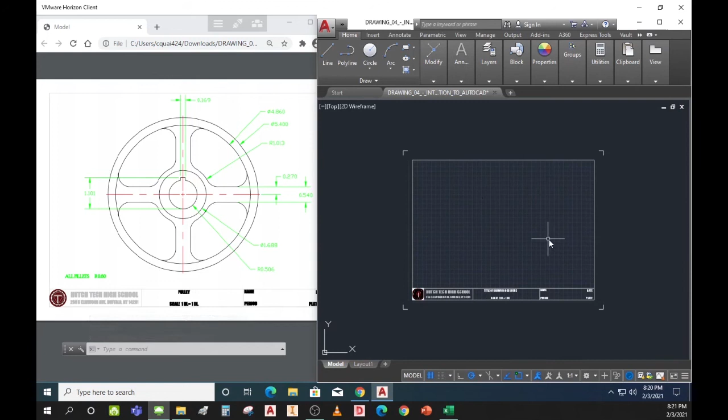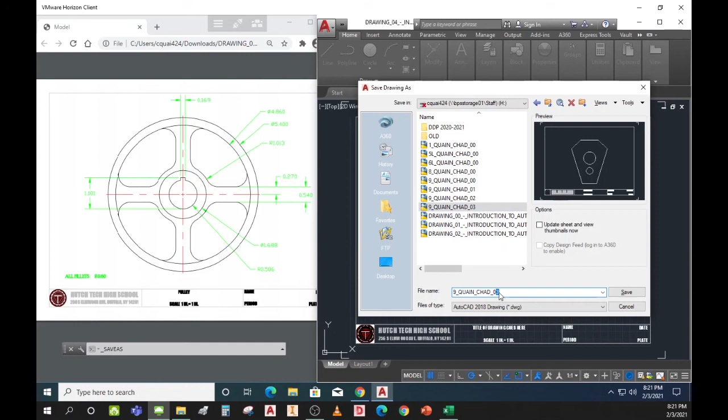I'm going to do my zoom extents, which is just a simple double click of my mouse. Then I'm going to come up to my A, go to save as, change it from documents to my H drive, pick my way to store my file. Remember, 9 is my fictitious class number, last name underscore first name. Change this to drawing number 4, and hit save.

Now I'm going to go ahead and turn on my autosave. So it's WSAUTOSAVE 1, enter. Simple as that. Now I've got my autosave working, so that way if anything happens, I've got a backup plan.

So I'm going to come in here, go into the line command to start with, and find the center of my area. I've just drawn a line from here to here, left click, enter. Now I want to start by creating some circles. I'm going to come up here and go to circle, and you'll notice—oh shoot, I don't have the ability to find the middle of this line again.

There are some things I can do, and I'm not going to get into them too much this time, but we're going to type in a command called mid, M-I-D. That's going to show me the midpoint for this object. We're working? There we go. All right, so I'm going to click there.

Now let's take a look at one of our dimensions. You'll notice that most of these dimensions are diameters—if you see a circle with a line in it, that means diameter; if you see an R, that means radius. So let's look at our largest diameter first. Here's our outermost circle, arrows pointing to it, and notice our arrows point directly to the center of our circle. That is correct dimensioning.

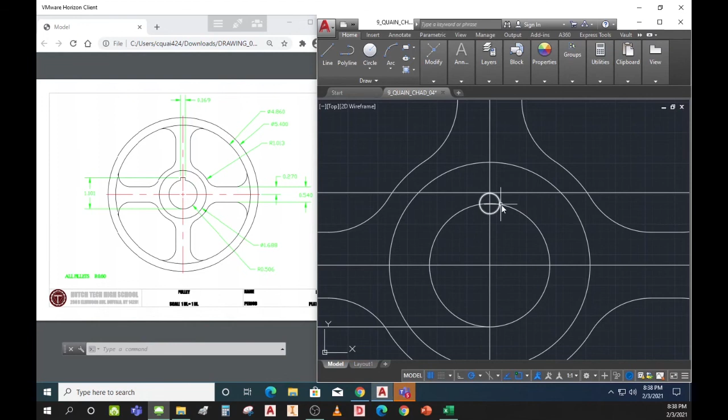I'm going to go into the circle command, come over here to this intersection - I want to do it right here. And then I'm going to type in D, enter, 0.169, enter. Now I have the exact width of my keyway just by that circle right there. Wherever it intersects this other circle, I know that's how wide it's going to be.

So I'm going to do this - draw a line from this intersection point straight up. I don't care if it's too long. Right click, enter, right click, repeat line, or the space bar, whichever one you got to do. Straight up, right click, enter.

I don't need this circle anymore, so let's just get rid of it - extra information that we don't need. Now I'm going to come into modify, trim. All right, let's go back to the old school way. I'm going to select this object here, this object here, this object here, this line here, this line here. So I got all those things selected.

Probably don't need that line there, so I can hold the shift key and select it, I believe. No, it's not going to let me do it. Doesn't really matter. And then I'm going to go ahead and right click.

Now I'm going to select on the pieces that I want to get rid of. I don't want to get rid of that circle, just want to get rid of the lines that are in here. And make sure that you go in the order that I went in - I'm starting at the outside most line, and then coming into the next one.

And then I'm going to do this line here, this line here, this line here, this line here, and this line in there. Okay, right click, enter, get myself out of it. Now, why did I pick those lines out there? So that I didn't have to come back and delete those later on.

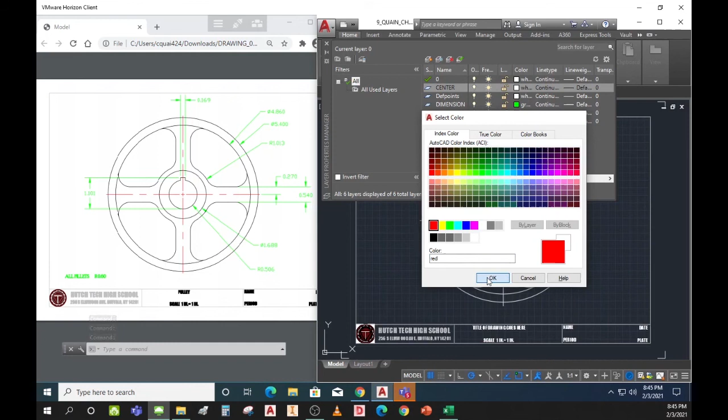I'm going to come over here and change its color from white to red, hit OK. Then I'm going to come over here to the line type and change it from a continuous straight line into something called a center line. So let's click on this continuous, and notice we only have a hidden line sitting here and a solid line.

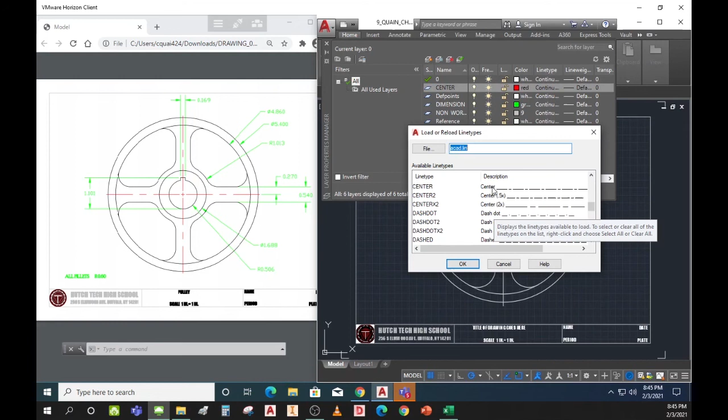Well, that's a problem. What we need to do is click on this load button, and then scroll through and find something called center. Now don't worry about this half-scale center and this double-size scaled center, we're just going to use the regular old center. I'll hit OK. And then the last thing you have to do, which is kind of silly, is you actually have to select center and click OK.

So now that we've got that, we have our center layer highlighted. I can go up here and click on the close button.

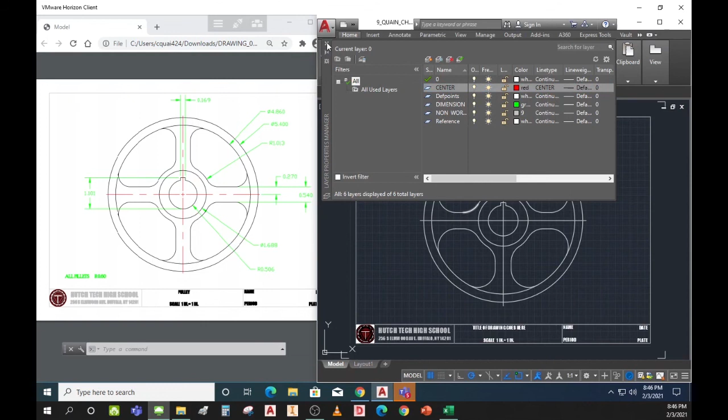I come over to layers again and change my center layer. Then I'm going to select this line here. Notice that they are sitting on the 0 layer, but I want them to be on the center layer, so I'm going to simply click them over to the center layer.

Pretty cool, I'm going to hit escape. All right, so these look pretty good. Now there's a little bit of difference - I've got this little crosshair in the middle, but we're not going to worry about that for this. We're just going to get it so that it looks pretty good. And I think that looks pretty good.

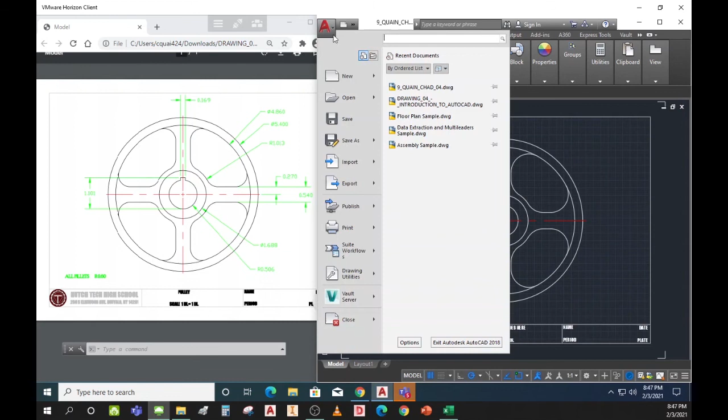So now the next thing that we need to do is a hard save, because we've done a lot of hard work. Let's go up here and hit save.

Now that we've saved our object, the next thing we're going to do is go through and start doing our dimensions. Now, in order to do dimensions, we have to do a couple things. First, we need to change our layer, because right now we are on the red layer, or the center layer. We don't want to be on that. We're going to come up here to layer, change this to the dimension layer.

Now the next thing we're going to do is start with dimensioning. But before we do that, why don't we make sure that we have everything correct up to this point? Now, I don't want you going through and modifying anything, because if you start modifying text, you could possibly put it on the wrong layer, and I don't want you doing that. But just do a final check, make sure everything looks right for you.

So the next thing we're going to do is start putting our dimensions in. We're going to come up here to Annotate, and then we have this dimension, called quick dimension. I'm going to click on quick dimension, and then we are going to start to dimension some objects. So all I'm going to do is just click on them.

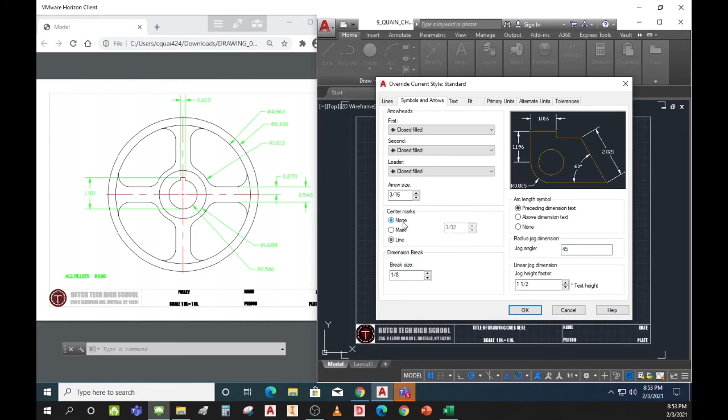Now, I could turn it to - take a look at this icon right here - if I had mark, see it just shows a little crosshair in the middle. I can go line, yeah, it makes it a line there. Okay, I'm going to just select none for this, it just makes it a little easier. Go ahead, hit set current and close.

Now let's try that one last time - dimension. Okay, selected my object. Try to get it so that our dimensions are on the outside of our object. All right, and notice it will place it anywhere on the circle. I'll place it right about there - it's not too close to the border, but it's not on the wrong side of the object.

I'm going to select another one here, which is going to be this circle right here. All right, I'm going to stretch it out.

And I'm going to go ahead and place it similar spot to where the other one is. Okay, I don't know what this is doing here. I like that, I don't know why it's doing that at all. So let's go ahead and delete that.

Let's try to go back into annotate again. I don't know if maybe I clicked something here. Oh, that's kind of weird. All right, so there's that. I must have double clicked or something. Let's take a look at another one here. We got radius here.

And then, oh, I see what it did. See how it's trying to do it. See how it's trying to do this here. We don't want that. I'm going to go ahead and enter, and then hit spacebar again.

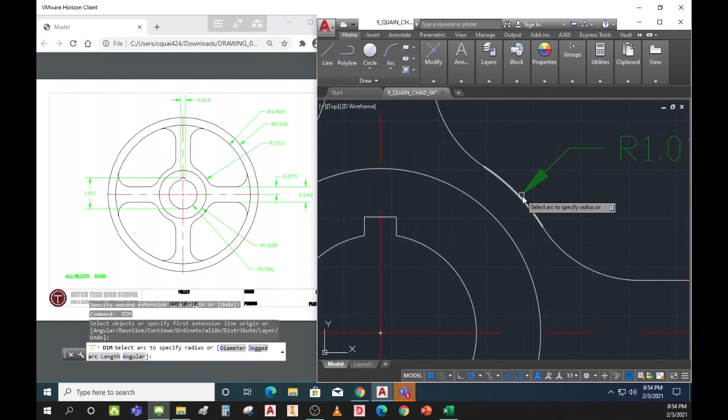I'm going to try to pick this circle right here. Okay, now see how I had to zoom in real close to get it. Sometimes you have to do that. Go ahead, click. Remember, I can stretch it out if I need to.

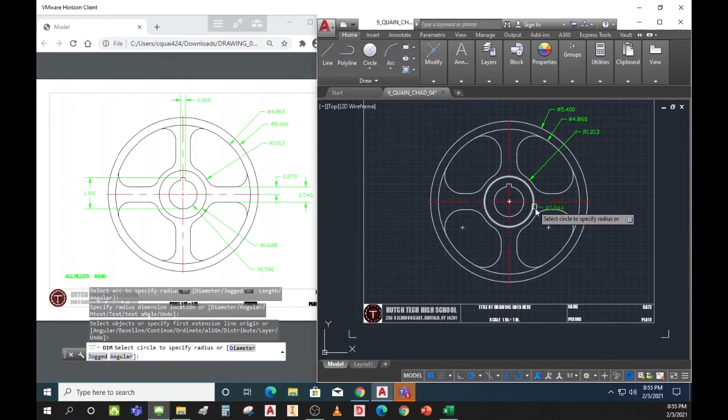And I'm going to place it. I'm going to look here. I got a couple more. I've got this one right here. Go ahead, place it in a similar place. And then I've got this one right here. Right here.

All right, so now we're done with all of our dimensions here. I'm going to hit escape one time. Escape one time. Escape. There we go. All right, so now if we look at our dimensions, they look pretty good except for this one right here. This one is definitely wrong.

So what we can do is we can go ahead and fix it. We're going to go ahead and change this so that it is the correct dimension. This is obviously not right. I'm going to double click on it. There's some easy ways to do it, and there's some hard ways to do it.

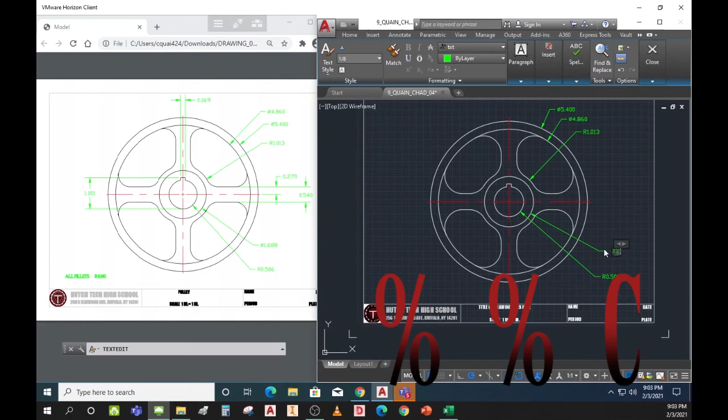I'm just going to delete this off, and I'm going to type in the following: percent C, which is diameter, 1.688, and then enter. Or click in the black abyss. Just want to change that one to percent C, 1.688.

Now, the last thing that we've got to do is put in a couple of dimensions here, here, and here. Let's go back up to that quick dimension. We're going to click on this endpoint here, this endpoint here, drag it over. Beautiful. And we're going to zoom in, click on this endpoint here, this endpoint here, and place it.

Last one is going to be our overall height, so that was from here to here. Now, you see how it wants to put it at an angle? We don't want that, so we're going to go ahead and cancel.

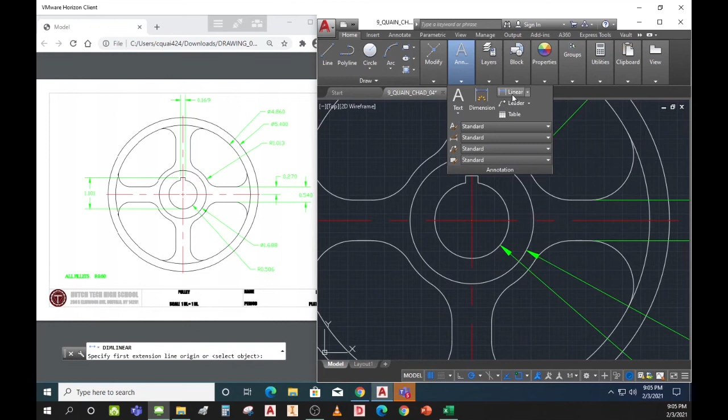We're not going to use quick dimension, but we're going to go ahead and use linear dimension this time. That way, if I click here and then I click here, notice what it does—it gives me a nice straight dimension. Place it over there. Beautiful. So now last thing we got to do is one more dimension right here.

And I'm going to use that linear again. I'm going to click here, click straight above, slide it over, and place it. Oops, now it did not go where I wanted it to go. So now I can go ahead and use the shrink stretch, and I can just kind of move those dimensions around to where I want them to be. Hit escape 2 times. Okay.

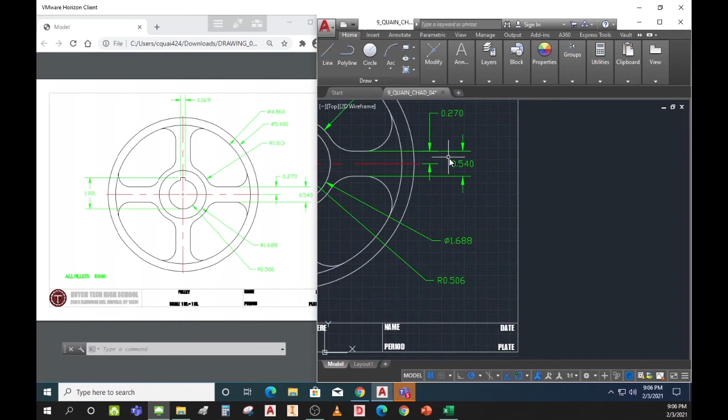Now, we can get all fancy. See how if I highlight this, there's a dimension line that kind of sits here? We could get all fancy and actually turn that dimension off, but I'm not worried about it right now. I'm going to leave it right where it is, and we can fix that later. And by later, I don't mean this drawing.

I mean another drawing. So let's go in here and create this text right here, this fillet. Go text box, we're going to do a single line text box and we're just going to place it. Let's see here, following our height, it says height, we want 1/8. Enter. Angle, we want it at 0.

And we're going to type in the following, all capitals: all fillets R0.60. All right, and click in the black abyss. And there we go. And then hit the escape key. So now we've got this part done.

Last part you would do is go ahead and change the dimension or change the title here to Pulley. Black abyss, click here, change your name, date, plate number, period. For me, it's our fictitious number of 9. All right, up to the A.